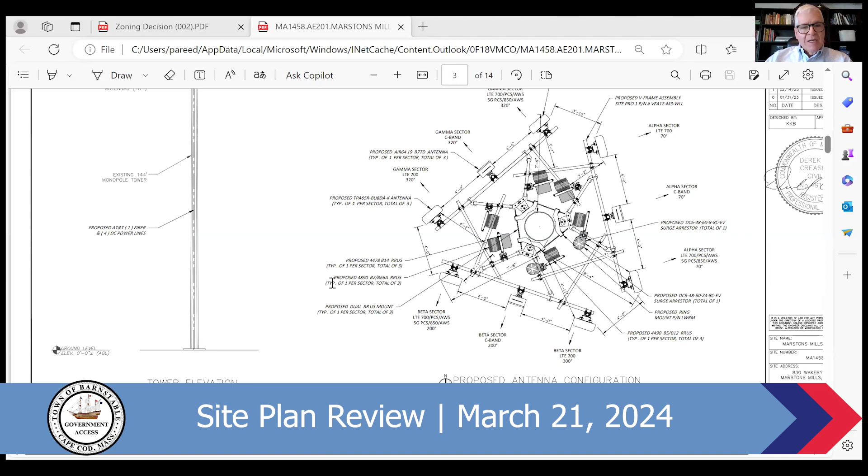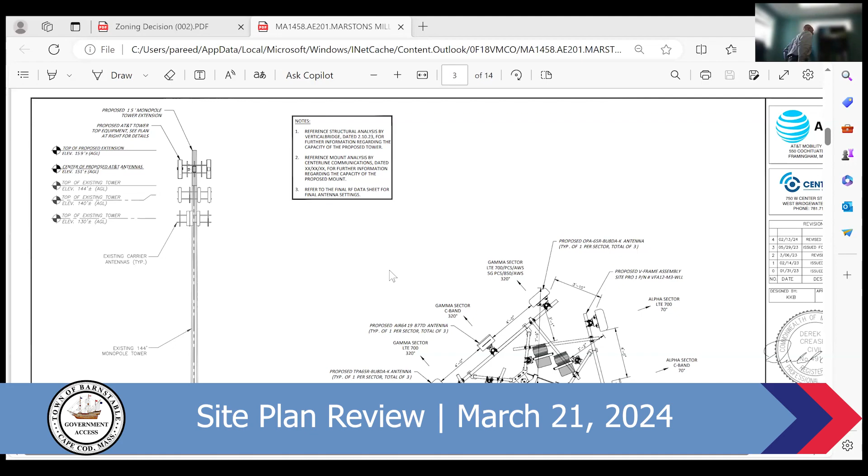Terrific. So I represent AT&T. We're an FCC provider of wireless services. There is an existing 144-foot monopole tower that was approved by the Town of Barnstable and the Cape Cod Commission. The current tower is at 144 feet, which is just above the existing antennas here. AT&T is proposing to extend the tower 15 feet and co-locate its antennas in similar fashion to the other two co-locators. I'm going to skip down to the site plan. So this is the existing fence compound where two carriers are already located, T-Mobile and Verizon.

AT&T is proposing to put a walk-in cabinet here with its electronic equipment. There'll be an ice bridge that goes over to the tower, which takes care of the fiber and cables. Cables will enter the monopole and proceed up to the antennas for the connection. We're also proposing a 20 kW propane generator, similar to the others on site, and a propane tank to fuel it. We've added some bollards around the propane tank.

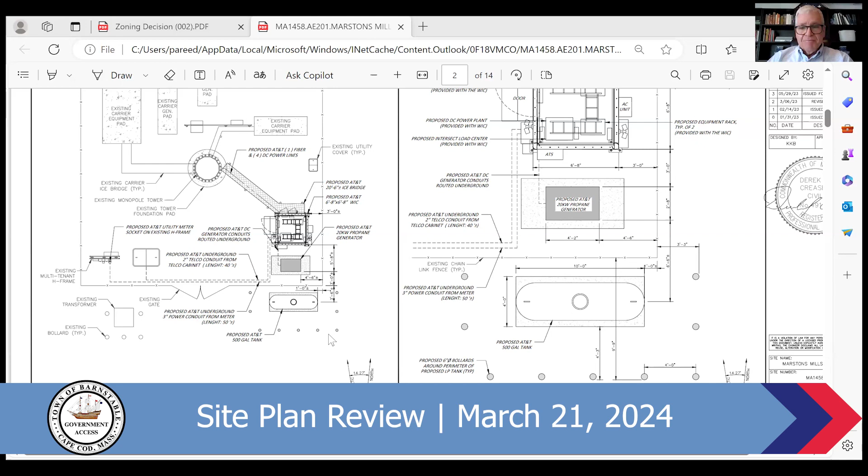At the informal site plan review, there were a couple of questions, and I think we've addressed all of them. I did send an email yesterday to Matt Robel about the containment. I don't know if Matt's had a chance to review that yet, but I think that was the extent of the comments from the site plan review we did a couple of weeks ago. It's pretty straightforward. We do need to go to zoning either for a special permit or to amend the variance decision which granted the tower. Probably a special permit, but I have an email ready to go as soon as we finish this, over to Kate and Anna in zoning. With that, I'd be happy to answer any questions.

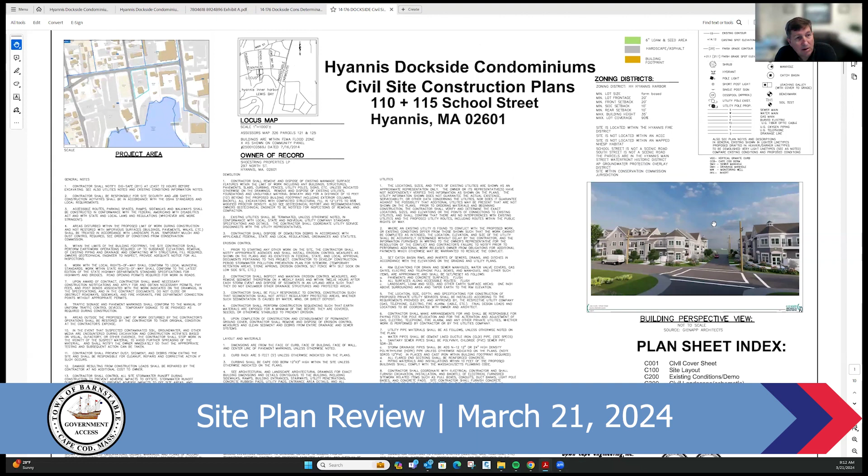We feel it'll be a very attractive building. This one has a long permitting history, but in short, the zoning was altered in the area to allow 2.5 stories with 1 parking space per unit. The density was altered to allow parking layout and buffers to determine the density, so we were able to put a little bit smaller units in. The max lot coverage is very generous at 90%. The building height at 35 feet and 20-foot front setbacks.

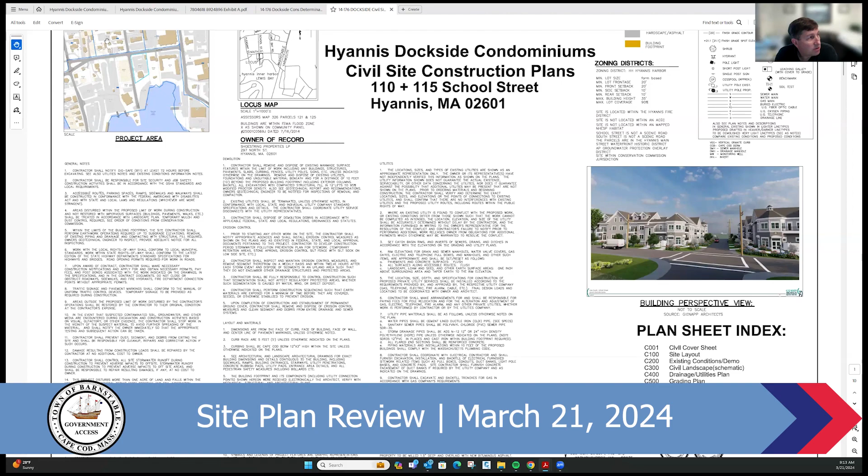You may recall the last project, we were looking for some relief on the front yard setbacks. We've pulled that in and are no longer seeking any relief, so we've got the full 20-foot setbacks. There are just a couple small balcony exceptions in the code. The front facade is allowed to project a few feet into that, and there are 2 places where that happened, but very modest and kind of helps break up the front facade of the building.

We've got a requirement for a 10-foot landscape setback, and we've got nearly 20 feet all along the street. One of the latest features we did is, in talking with engineering, they would appreciate a place to pull off for loading and unloading. Parking areas are not allowed in the front buffers, but this is absolutely to be signed no parking - this is a temporary loading and drop-off area only, which is permitted in this district in the front yard.

The main feature of this site is underground parking, so we're hiding all those ugly automobiles from sight - they'll simply tuck down underneath. One of the latest changes to the architect's plan is that we're going to drop doors in front of these, quick open doors, and seal off around the outside. There's some air handling requirements, but not too onerous, some ventilation of course, and you've got the rated floor system. What that'll do is tighten up the building.

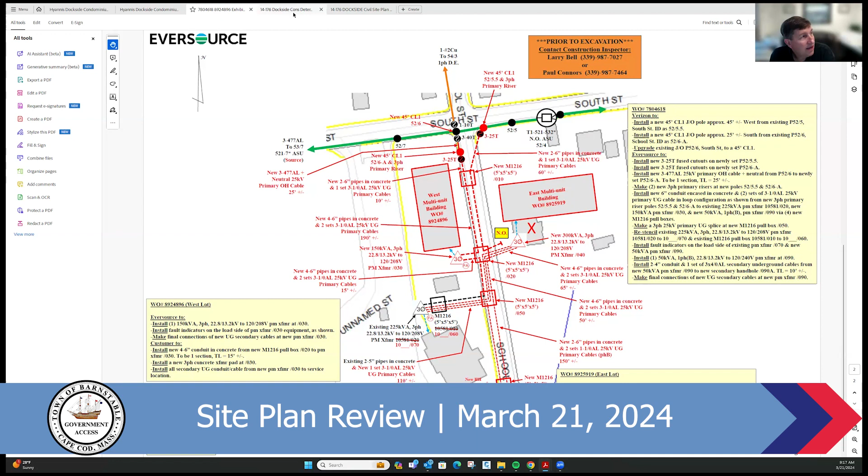We're introducing 10-foot high light poles along the street to light it up. One of the features of this site is we're working with Eversource to get all the poles taken down on the street. This is their work order, which is a little messy, but that's the basis of design for what we're doing here. We're dropping all the utilities underground, neatening up that streetscape, and we'll have a drop pole up at the corner, and of course the trunk line along South Street will remain. But all the other poles coming down School Street will be brought underground to neaten up the streetscape, and you'll just have little 10-foot high pedestrian scale lights along the road.

Engineering asked for a paved walk area on the west side, so we introduced that. We had a good productive meeting with engineering along the west side of School Street, and so that'll effectively have a Cape Cod berm and a 5-foot sidewalk there, and that'll emerge onto the Grasscrete turning area, and then the lighting is shown adjacent to that. So we feel that's a good design.

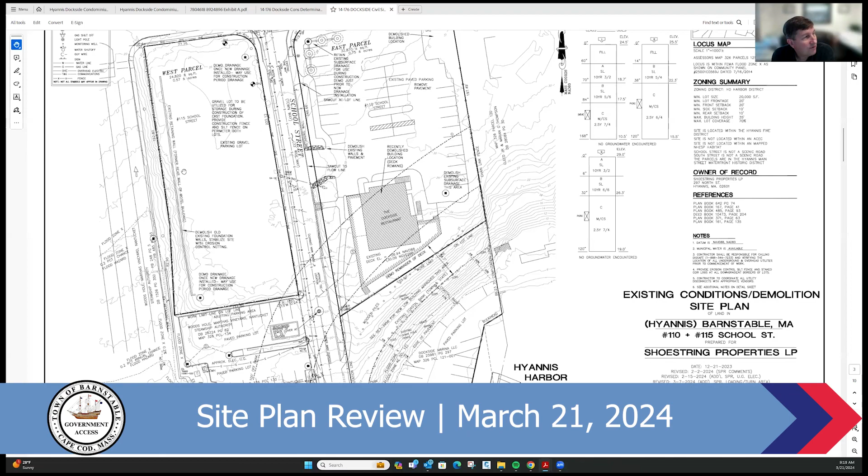Yeah, I see. And there's a pole, there's remnants of the deck that are being removed. We're going to demolish the old foundation walls. There was a kind of a 2-story strip motel on the 115 School Street side. That's going to be demolished, replaced with a rather large segmental block wall. We did receive back the design documents on that. As requested, that'll be a separate building permit for that wall and carefully engineered design to level off the site and allow us to construct on the west parcel. So that's underway. The civil landscape plan carefully just is for general purposes mirrors the architect's landscape plan.

We've tidied that up to match Andrew Garrelay's plan. And for utilities, we're working with Hans over at Water, introducing a new 8-inch cast iron ductile iron main to replace the older, I believe it's a 4-inch main that's in the street that's quite old. We'll connect into some recent work that was done, fairly recent work for the Steamship Authority, where there's a hydrant down in this area.

The fire department connections, we worked with the fire department on that. What we're going to do is we've got fire department connections at the southwest corner of 110. We're going to introduce a new one at the northwest corner of 110 and the northeast corner of the west parcel, which is 115. So in that manner, you'll have 4 fire department connections, one at the primary corners up at the intersection and one at the primary corners down by the new hydrant, which we're bringing in right about here on the site plan. And that again will be a nice loop with good pressure from both sides.

Forming up a closed loop so that the water can flow freely in their area if there's any blockages. And of course you've got the larger mains out on South Street with hydrant number 92 up here that will be within 100 feet of the fire department connections on the north side. So they'll have more options. It's fairly common in town to have additional points, and that just keeps your options open. If a fire does break out in close proximity to one of the fire department connections, you've got the other one to help pump water into the building.

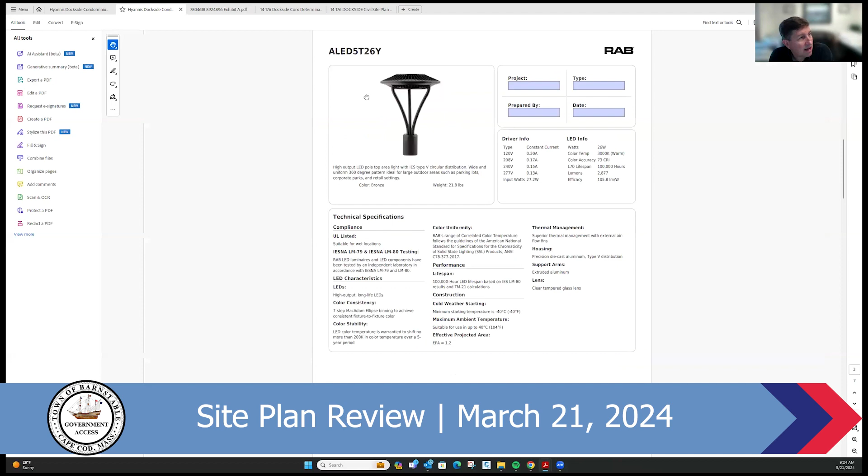And we do need a little bit of safety along the street, so I think the spirit and intent of the bylaw is met there, that we're not a hazard, and it's only low level downward casting light. There's zero light cast upward—it's basically dark sky initiative rated, where there's no light cast towards the sky.

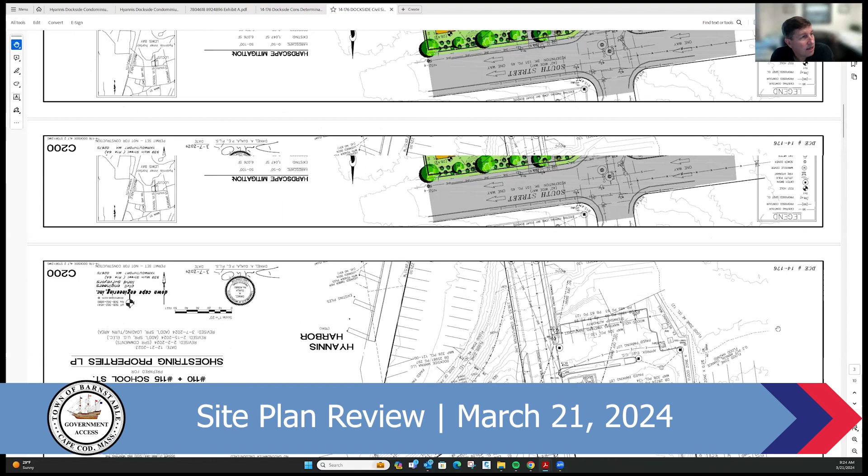We've been through the Conservation Commission with the latest plans. We've got an RDA and a notice of intent for the 2 sides that clears up the conservation permitting. The stormwater report was submitted to both conservation and the engineering department, and we're looking at approvals and an order of conditions on the RDA.

The one on the west barely nicked the 100-foot zone, so that was the lesser filing, the request for determination. The eastern one we handled with an NOI, and Andrew Garlay did a separate plan breaking out that landscape mitigation package, which vastly exceeds what's required.

So we think this will be a good project. The zoning table is clearly met. The setbacks are all compliant. We've got parking that actually exceeds the required amount, and the density is per the layout.

We've got the parking broken out here on the west side, 32 provided, and that's for 44 bedrooms in 26 units, so about 5 extra spaces there. Similarly on the east side, there's an excess of parking.

With the drop-off areas, we feel that—and again, School Street is a secondary street, off the main South Street. It's a dead end, and a little bit of turning movements in the public way there shouldn't be particularly onerous.

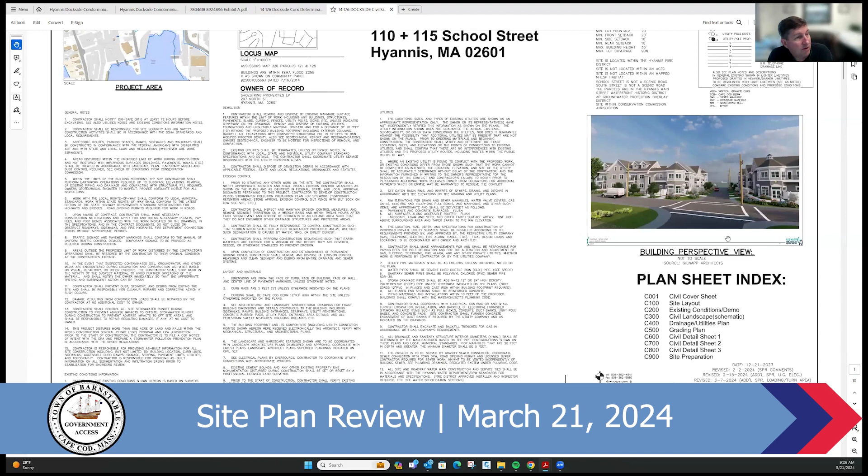And again, we're hiding all the cars. It's very expensive construction, but we're bringing everything underground, hiding it. It'll be very attractive, as you can see from this picture here—a very attractive streetscape—and even the couple of poles going down School Street are now planned to be brought underground to increase the view shed looking down onto the harbor. So we feel it will be a great addition to the town.

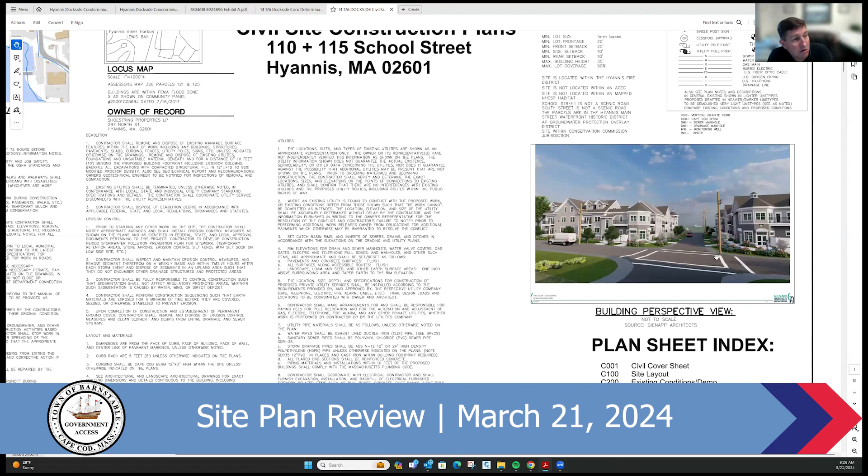Michael is here to answer any questions and can bring up the building plans if you have questions. Stuart, the owner, is also here. Again, it's a great design that he's come up with—handicap accessible right in at ground level, and then there's a half stop elevator to get you to the first floor and up to the second floor, and it goes right down to the parking garage below.

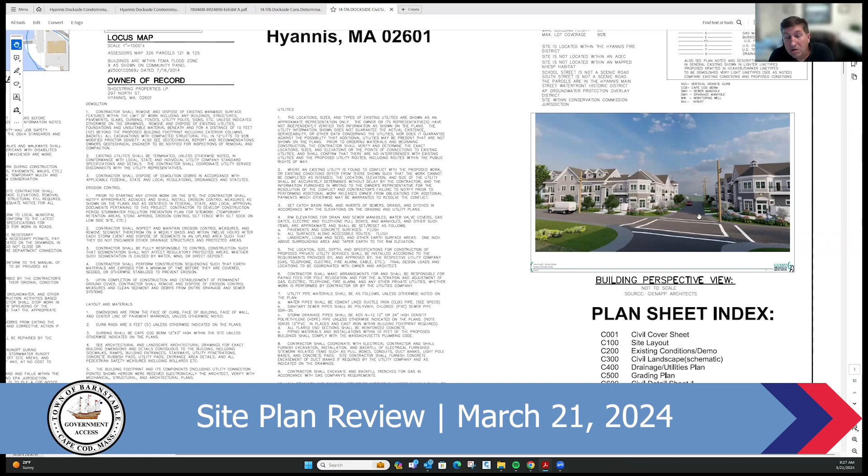There's 2 elevators on the larger building, 1 on the smaller building—nice pedestrian friendly amenities in and out right at grade. A nice looking building, and we feel it'll be a great addition to the town. We feel it's all as of right—we carefully looked at all the zoning regulations and bylaws, and feel we fully meet all of the codes that are required of us, and look forward to being a good neighbor. Be glad to answer any questions if you have them.

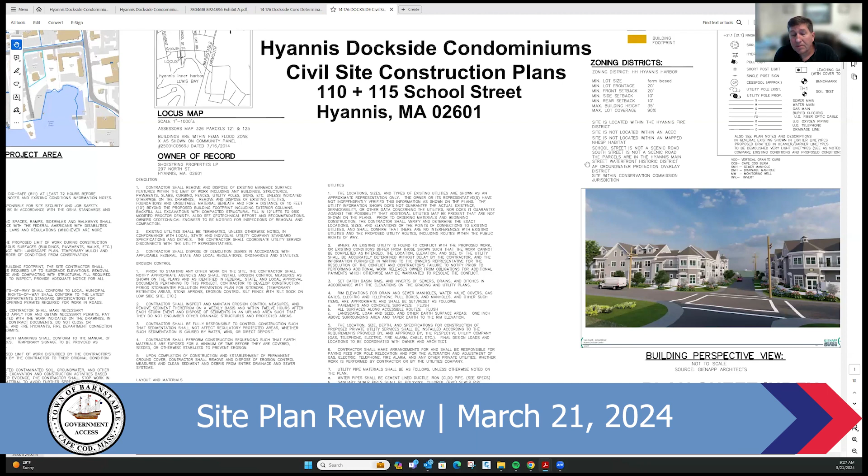Mr. Ojala, you confirm that you're presenting this as an as-of-right project for zoning purposes? Yes, there's not one thing we saw that would trigger any zoning relief. We're compliant with the height, and we do careful calculation of the grade plane to the high points of the roof. We've looked at the density, the parking, the landscape buffers, and the loading zone requirements. We're exceeding the parking and have met every other requirement that I can see. Glad to chat about any points if they come up, but I think we're fully as of right on this one. Great, thank you.

Okay, I am going to ask Mike to go ahead and do a very brief overview. This is about a site plan review, so I don't want to get too much into the weeds on the building, but since this is a public meeting, I'd like to ask you to give a brief overview of the buildings for the public's benefit. I'd be happy to. My name's Mike Nee with Gienapp Architects. I'm going to have my coworker Samantha share her screen so I can talk. Sam, can you bring up the site plan, I mean our set, please.

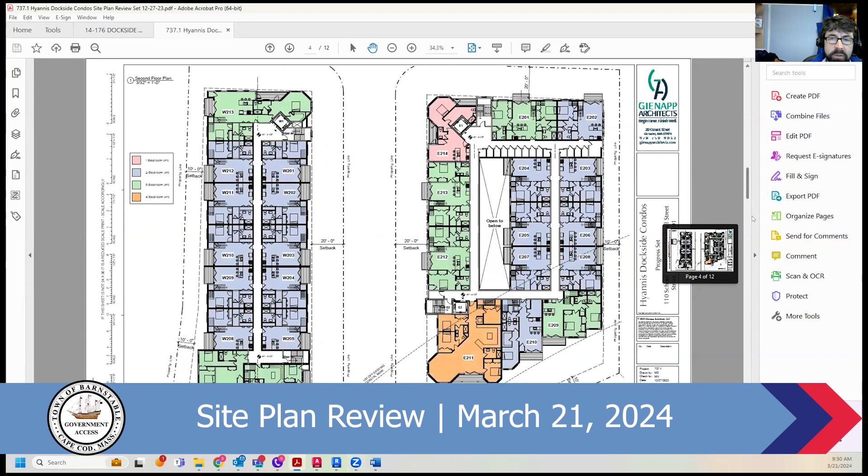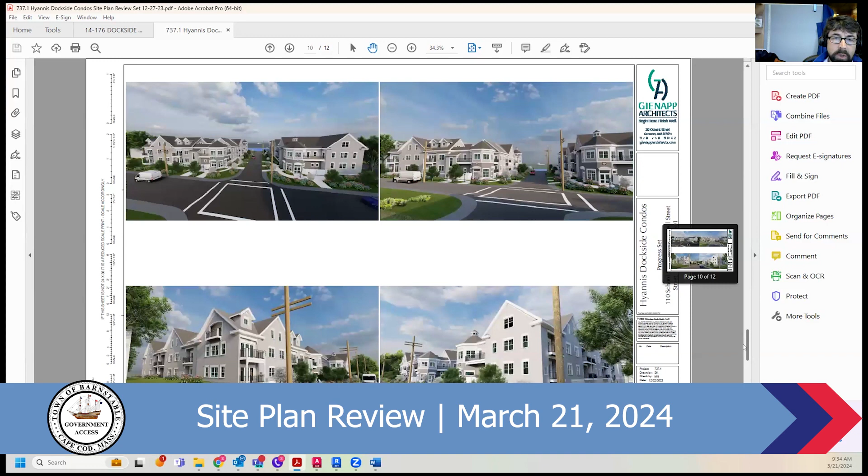Maybe you can switch to one of the elevations for us, Sam. Thank you. Yeah, so again, these pitched roofs, these 10-pitch roofs, are a very traditional New England roof form. In between those we break them up with these transparent roof decks that break the length of the building into nice individual elements.

I think that's kind of the view from up on high. Brian, I don't know if you want me to get into any more detail. I think Dan's gone into some of the data on it already. Yeah, no, that's fantastic, I appreciate that.

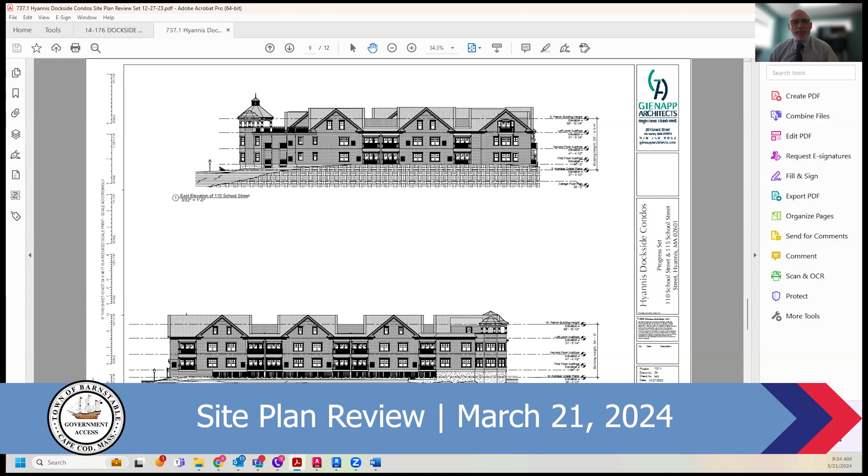One other thing I'd add, Brian, is that we were unanimously approved by the Main Street Waterfront Historic District this time. There is a brief appeal which we'll handle, I think next week, but the unanimous decision by the board on approval of the style of the building stands. They have careful control of the area, and they did approve of it so far.

All right, we will go back to staff now, and then when we're done with that, we'll have public comment. Beginning with Maggie, have we received any correspondence on this matter?

For staff correspondence, the only comment I have is from licensing again, and they do not have any requirements for this project. Great, thank you. Planning and development, please. Thank you, Brian. Kate Maldonado, Planning and Development.

We do have some comments, many of which have been discussed to date, but for the record I'm just going to summarize and walk through them. Further detail on all the comments will be defined in the letter that Maggie sends out to the applicant. The first comment is that due to the scale of this project, formal site plan review is required, as we are here today. Additionally, the applicant was required to send notice to abutters within 300 feet of the property in advance of this meeting.

The project is subject to Chapter 9 of the code, the town's affordable housing requirements, which requires a minimum of 10% of the units, so 5 units deed restricted at 65% of the area median income. There are several steps defined in more detail in the letter regarding that process, including a regulatory agreement and declaration of restrictive covenants, which needs to be recorded with the registry of deeds prior to occupancy.

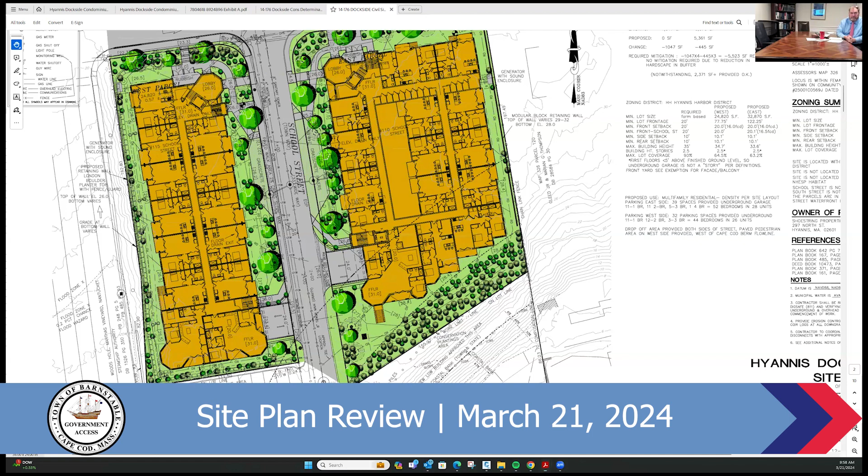There are 50 some odd units here, and this is a different world, especially since COVID, where you see not only UPS and Postal and Federal Express that you saw before, but the Amazon trucks, DoorDash, and everything else. We suggest to you that it's just not sufficient to handle the drop-off as what this project will anticipate, certainly in the summer months, with 50 some odd units, people down for the holidays, not only getting things delivered during the day through Amazon and other delivery services, but also all the other delivery services that now typically come to people's homes.

It's just not adequate. The backlog on this property, once those spots are taken - and how long is the drop off? Is it 10 or 15 minutes? Is it 20 minutes? It says no parking. We suggest to you that it's going to be impossible to enforce, and it's going to create a giant problem.

Now, if somehow the applicant could arrange for some type of a turnaround on its property itself, where they could actually access the property, that would be a much better solution than having these large delivery trucks on School Street. And if one truck or two trucks are in there, they're going to have to go to the bottom. Turnaround at the bottom is extraordinarily difficult, especially if someone's already down there at the water, and it's going to create a bottleneck and potential life safety issues that we're concerned about.

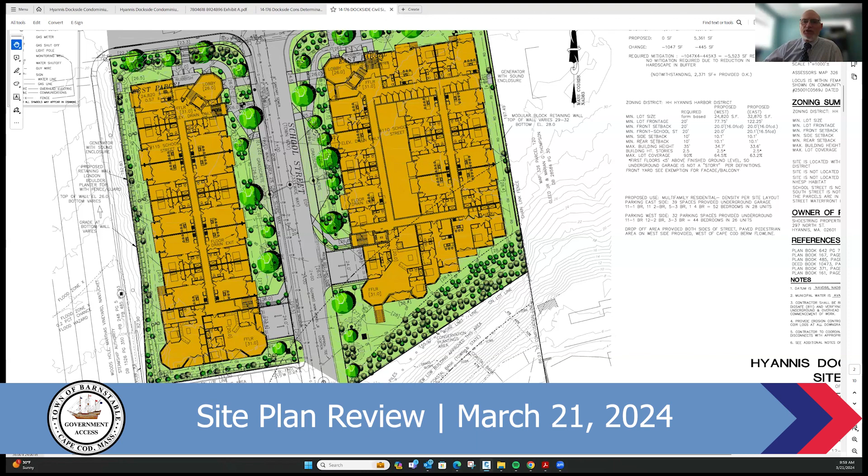And the last one, Brian, is that this particular project - and maybe this is part of the building permit process, and if it is, forgive me - there's no plan with respect to construction. If you look at the seaside portion of the property, they're subject to conservation restriction and within the buffer. There's absolutely no place on these properties where a crane can go.

You're probably looking at construction with, if they're building both buildings at the same time, 30 or 40 workers at any given time. South Street is an avenue for ambulances that deliver from not only Mashpee, but come right up that way. There's no parking on South Street. There's absolutely no definitive plan on how to construct this.

This is a major construction project requiring massive cranes. If this was in Boston or anywhere else, there would have to be a fairly comprehensive plan of where everything is going to wind up. And just a statement of, oh, we're going to get parking across the street or this or that - I don't think that's sufficient if there's a building permit. There needs to be a comprehensive plan on how this is going to be constructed.

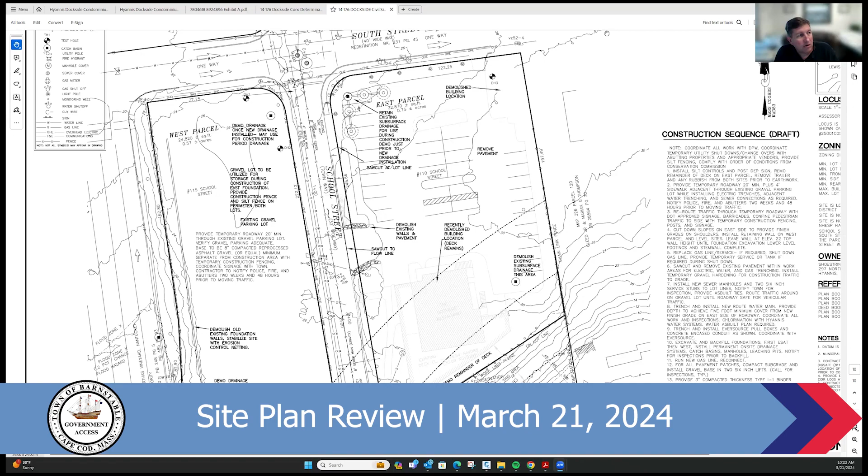We'll get that in a little bit better draft form for you. Happy to do that. This is a pretty comprehensive plan on how to construct it. We'll add some additional materials and get that right over to you.

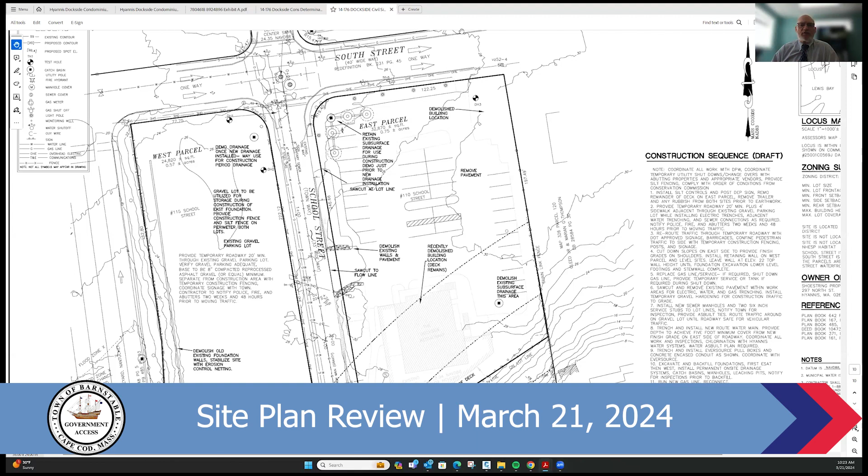All right, hang on a second before you go. Mr. Roble, it was your request for a construction management plan. Was this what you were looking for, and did you consider it adequate, or was additional information required? There was additional information I was looking for, building off of the retaining wall requirement. I'd be happy to speak to those items. There are a number of them, so I was trying to be brief in my presentation before.

What we're looking for includes the anticipated removal and delivery of any materials to the site. That would include concrete, any fill, or additional material generated by the site and hauled off-site. We're also looking for anticipated demolition and construction time periods and any planned breaks in the project schedule, plus identification of trucking routes and access locations, both at the site and to the greater project area, and how trucking routes would impact surrounding side streets.

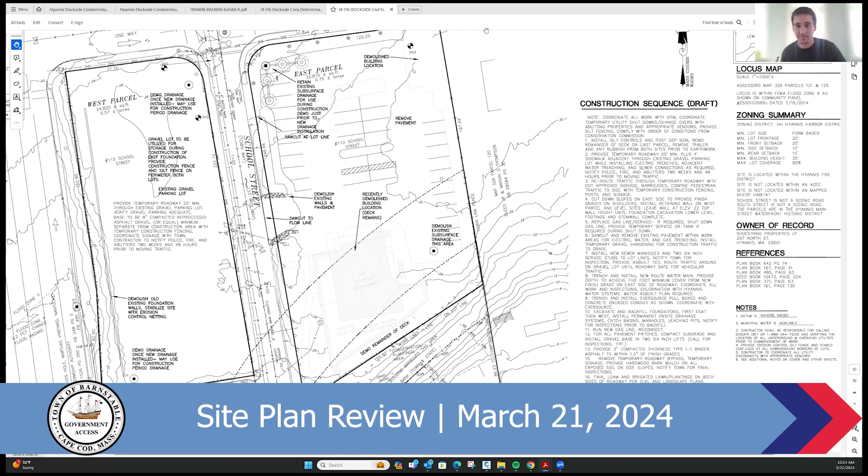Temporary drainage basins during construction, which I believe are at least alluded to on Mr. Ojala's plan, including justification of their size, location, and number. Erosion and sediment control types and locations, which are also partially alluded to at this point. Hours of construction, dust control measures, security fencing and public screening, and emergency access and lockbox locations during construction, coordinated with emergency services.

Coordination with emergency services regarding planned trucking routes and related traffic concerns, and a written description of how the applicant will mitigate stormwater control and site materials cleanup in the event of large stormwater events, where soil, sand, or other debris migrates into the town right of way. We're also looking for a construction procedure addressing potential impacts to abutting properties related to retaining wall installation or other building construction aspects. Thank you, sir.

That is the list I recall from our informal meeting. I'm going to ask that that be presented to engineering and a copy sent to Maggie Flynn for the record. I will take the matter under advisement until then. If Mr. Roble has any issues with the construction management plan, we will be in touch before any approvals are granted on this. Okay?